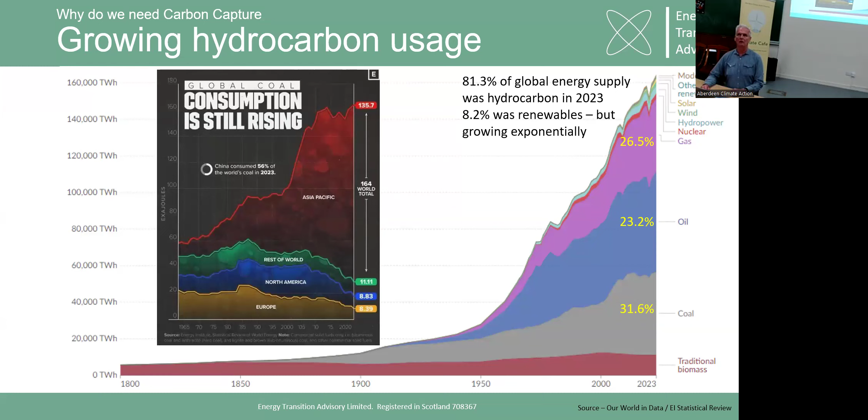And probably even more depressing, the consumption of coal has risen very sharply, notably in Asia Pacific, which translates to China. And when you build a coal-fired power station, you're generally building something that's good for another 25, 30, maybe 40 years. So we've baked in an awful lot of carbon emissions. So the thing we're considering doing about it is carbon capture.

And if you'll forgive me a little indulgence here, I'm going to use an analogy a couple of times tonight, an analogy with coffee. Coffee by itself is nice, tasty, but for some of us, caffeine's the problem. So we deal with the caffeine rather than getting rid of the coffee. And by a crude analogy, hydrocarbons work well for most people, but CO2 is a byproduct, which is clearly causing a problem, and we seek to deal with that.

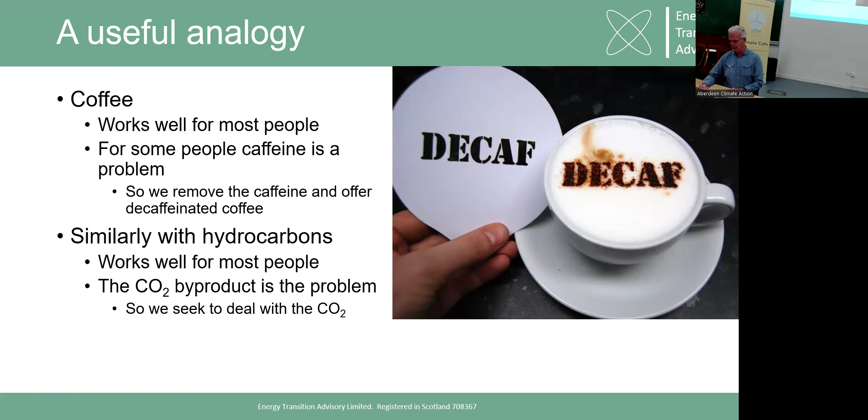So the carbon capture process, I'm going to build this slide up, starts with wherever we consume oil, gas, or coal. So this might be in refineries, chemical plants, fertilizer works, cement works, and so on. And at present, we dump all that CO2 to the atmosphere, sometimes for free, sometimes there's a carbon tax, sometimes there's an emissions trading scheme price.

And a couple of things to be aware of. The flue gas, that exhaust gas, is, depending on the nature of the process, between 3 and 15% CO2. So that means the other 97 down to 85% is not CO2. And the temperature is hot. It's come off a combustion process. So off the back end of a gas turbine, it might be 550 degrees C. Maybe at the top of a chimney, it might be as low as 150 degrees C.

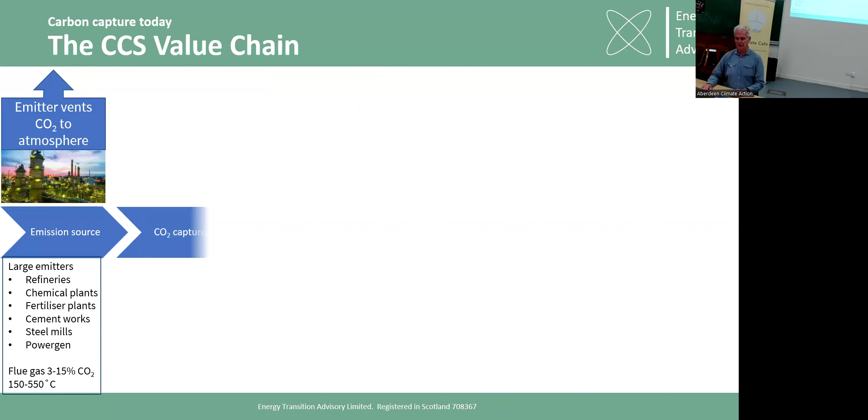So what we do at present is capture that carbon using pretty much one technology, and that is a chemistry known as amine. Typically, we can get through a year maybe between 90 and 95% capture. If the system's working well, it's 99 point something percent capture, but these things trip, they have imperfections. And the volumes we're capturing are big, between 250,000 and maybe 10 million tons of CO2 per annum. So this is a massive challenge.

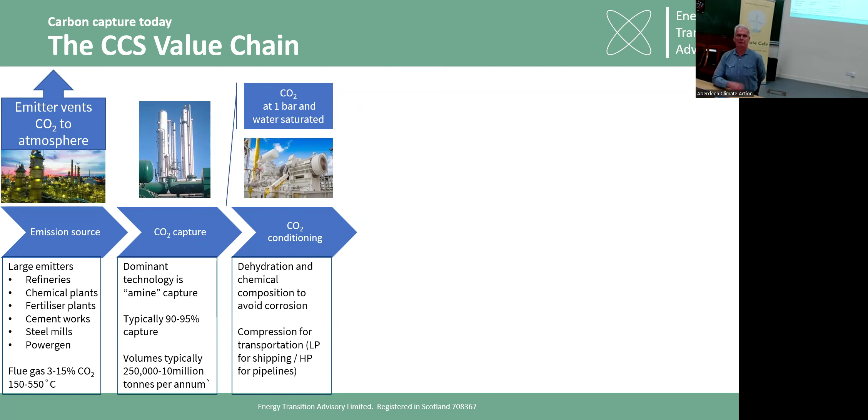Assuming the plant works, we end up with CO2 coming off the end, pretty pure, and water saturated, which is quite crucial. Water is a problem with CO2. CO2 by itself is not corrosive, but CO2 plus water makes carbonic acid, which rots steel very quickly. So we have to dehydrate it almost immediately, and we adjust any chemical composition depending on what was on the input side to clean it up.

We also compress the CO2 for transport, lower pressures for shipping, higher pressures for pipelines. Those pipelines, which are good for long distance transport of CO2, might be in the range of 80 to 120 bar, which is typical for oil and gas type pipelines. So we know we can build them. Density is about 1,200 kilograms per cubic meter.

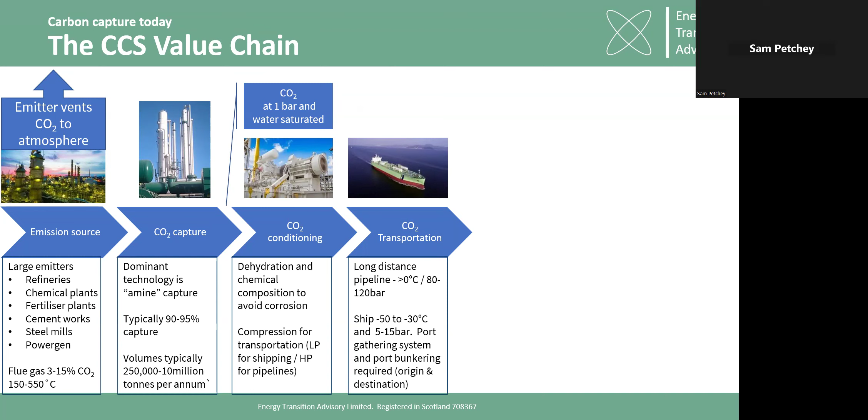If we ship the CO2, then we're between -30 and -50 degrees C, and much lower pressures because of the amount of steel required to contain the pressure within a ship. And of course, if you're shipping, you have to build a facility at the port of departure, another facility at the port of destination.

Assuming we've transported our CO2, it will generally go by pipeline to a store, so the same conditions in the pipeline. A typical storage well, we can inject in the order of 1 million to 1.5 million tons of CO2 each year, and we're injecting it deep underground into a storage reservoir. By deep, I mean 1 to 3 kilometers.

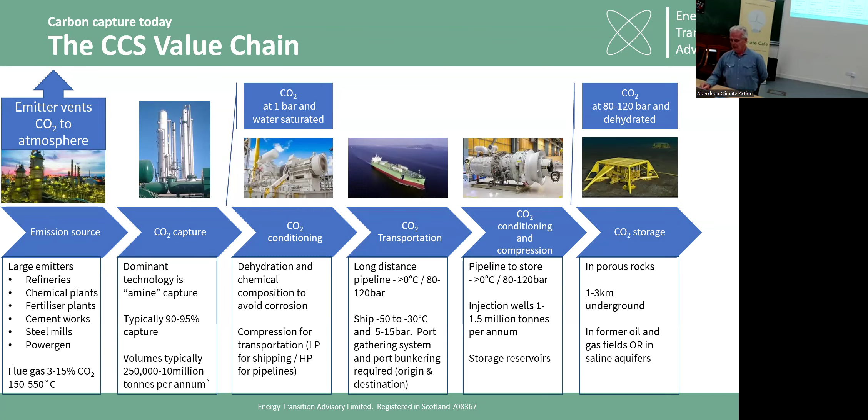Probably the neatest place, the most convenient, the best place we have most knowledge about is a depleted gas reservoir, where we've taken mass out, so injecting CO2 is relatively straightforward. You hear a lot about saline aquifers. There's much more storage, but they're full of water. So we need to, in many cases, remove water to inject CO2, or we need to find very, very big aquifers. So that's the basic process.

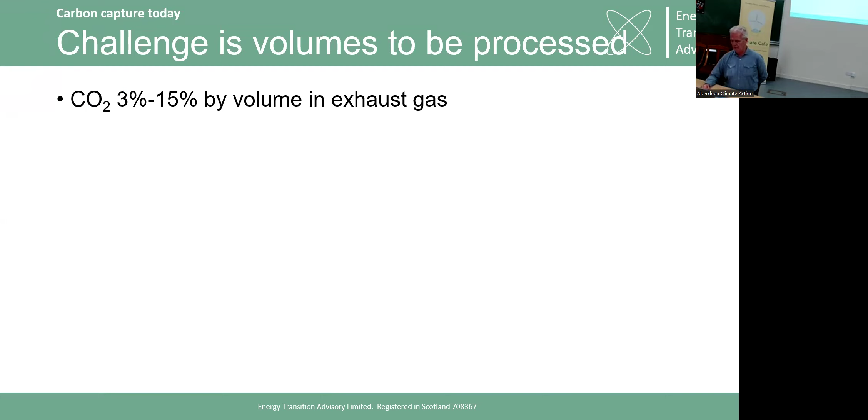The biggest challenge is this, the volume to be processed. As I mentioned, CO2 is typically 3 to 15% by volume in the exhaust gas. If I take a gas-fired power station, 3 million tons of CO2 means I've got to process 100 million tons of hot contaminated exhaust gas to extract the CO2. And to give you a sense of scale, I need to contact the CO2 in the exhaust gas with a liquid, a spray.

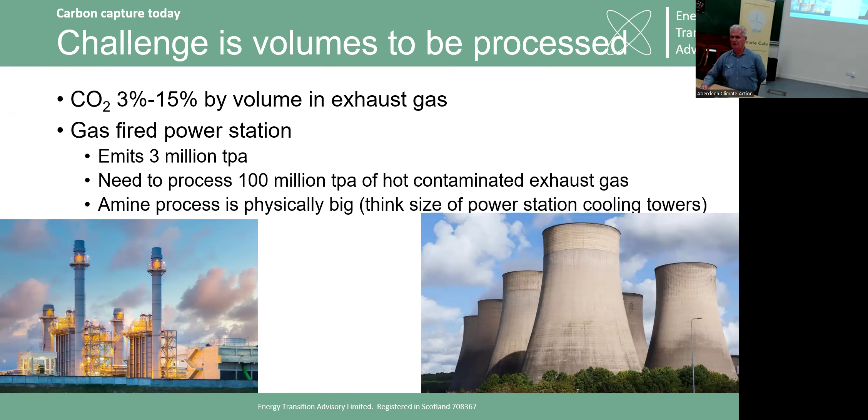And we need something of the order of magnitude the size of a big concrete cooling tower that we used to see at the old coal-fired power stations. Practically, we might end up with 4 or 6 or 10 smaller towers, but it's a huge undertaking to process this 100 million tons or so of fluid.

Now, the technology is actually pretty well established. Amine is a commodity chemical. It's out of patent. It's cheap. And it's very flexible. We have been using it for the last 50 to 70 years, extracting anything from 50% CO2 from a synthetic gas down to 0.5% CO2 from a natural gas. But at the scale we're talking about, as you'll see in a moment, it is both capital and operating cost intensive.

There are some newer amines which have been patented. Shell produced a thing they call Cansolv. Norwegian company Aker produced a new chemical, and a new start British company called Carbon Clean produced a new amine. These are, I would describe them as a bit better. They require a little bit less energy to release the CO2 from the amine, but they're still horribly expensive.

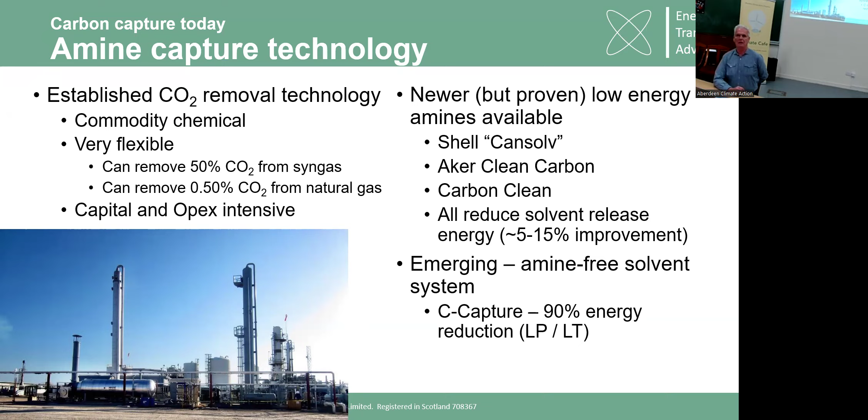There's an emerging liquid-based technology. A Leeds University spin-out has developed a liquid solvent which needs much less energy to release the CO2. So that's offering some potential, but it's still fairly early stage in its development.

Once you've captured it and compressed it, we need to transport it. As I said, pipelines are typically above 80 bar, density about 1,200 kilograms per cubic meter. We can ship at a variety of conditions. Low pressure and medium pressure are directly analogous to what we already do to transport liquefied petroleum gases around. So this is a modest amount of pressure, but very cold.

There's a new concept kicking around, which is to transport the CO2 in vertical bottles inside a ship, about a meter diameter, hemispherical ends, about 50 bar. And we could then inject that CO2 directly into a reservoir. So it offers the potential to reduce costs. But you'll see as we go down that list, the density goes down. So you need more ships to actually do the transporting compared to a pipeline.

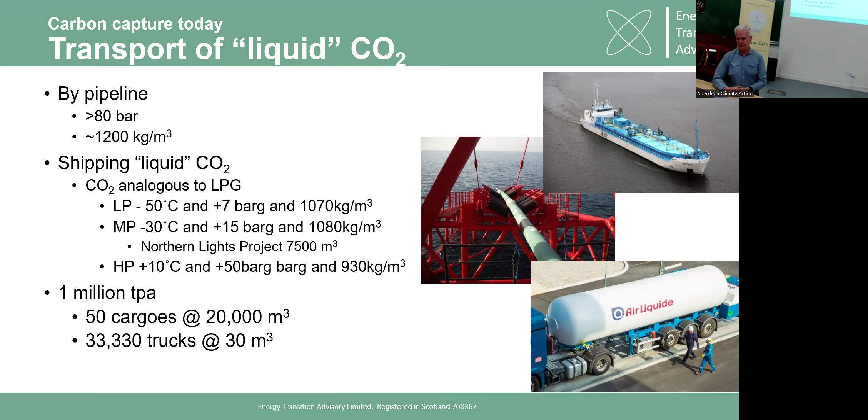And to put it into context, 1 million tons a year at some coastal emitter in Europe, shipping to somewhere in the North Sea, is probably about 50 cargoes on a decent sized ship, a ship by the way which doesn't exist at the moment, but it's potentially something doable, transporting by ship.

The CO2 process is very energy intensive. This is a phase diagram. You've got temperature across the bottom going from -80 up to +140, and you've got pressure in megapascals or bars on a logarithmic scale up the left-hand side. So at the amine plant, the CO2 comes off hot, but fairly low pressure.

In a pipeline, the CO2 needs to be liquefied in some way. So we're up either in a liquid state or a so-called supercritical state, which effectively is a liquid. So we're above that critical point. So we have to be both not too hot and quite high pressure. If we're shipping, we're down in this corner, much lower temperatures, but much lower pressures.

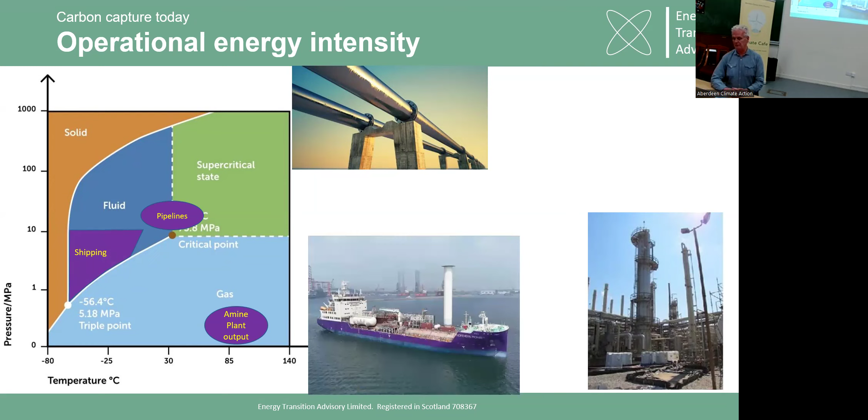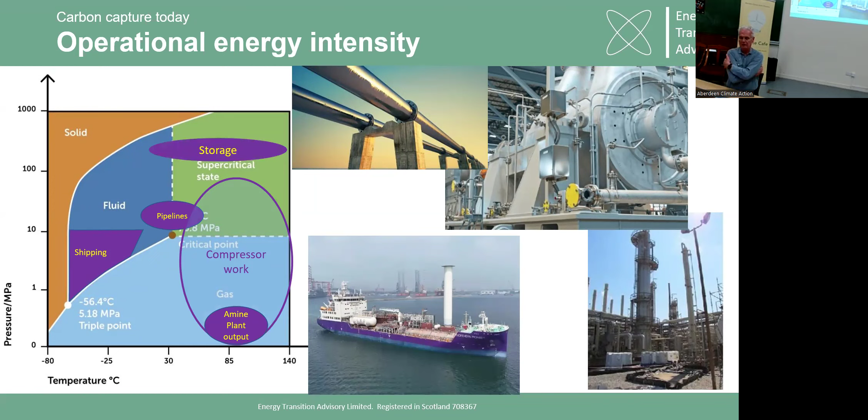And that particular ship is one of the two ships that's been built for one of the early North Sea CCS projects, the Northern Lights project in Norway. Oh yes, the compressor has to do a lot of work to move the pressure up, so a lot of energy is required to do that. And finally, we're going to be storing deep underground at quite high pressure, but quite high temperature.

So to summarize amine as a concept, it's technically well established. We can capture using amines, we can transport by ship or pipeline, we can inject underground. And right now, the Global CCS Institute counts 41 projects actually doing what I've just described. So capturing the CO2, compressing it, pumping it underground.

There's another 350 or so in development. I take that with a very big pinch of salt. There's an awful lot of projects that have been in development and then disappeared.

The crucial thing is that banks see this as proven technology. So if you're going to build one of these facilities, you're going to be spending hundreds of millions of pounds, and you're going to have to borrow money to do it. And banks take a very dim view of new technology. They don't like it because they see it as risky. So amine has one thing going in its favor, and that is that a bank will go for it.

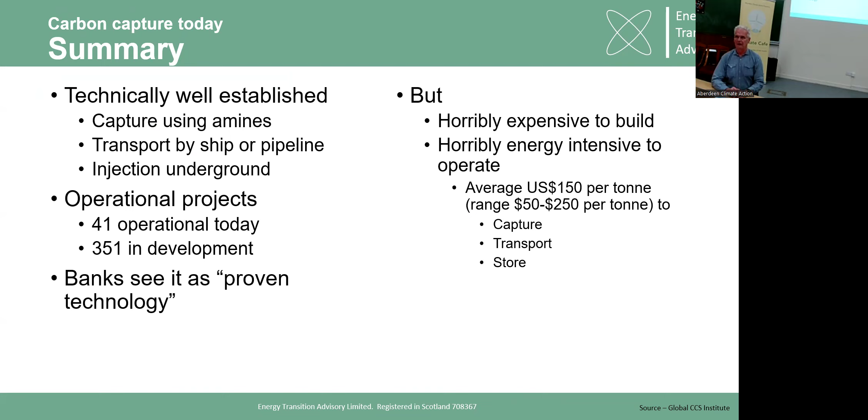But it is horribly expensive to build. It is horribly energy intensive to operate. And by that, I mean an average estimate about $150 per ton of CO2 captured around the world, and the range, sort of the easier things to do, maybe $50, and the harder ones to do, maybe $250 per ton. And remember, we emit 38 billion tons of CO2 each year at present.

It's also not very nice. It's caustic, toxic to humans, so we try not to release it into the atmosphere. And it introduced some exciting new hazards. So it's heavier than air, so if it leaks, it will displace the air, meaning it displaces the oxygen, so you die because you can't breathe.

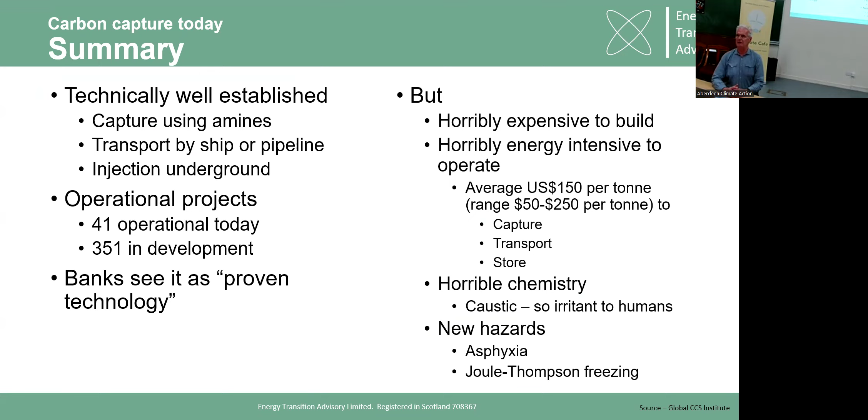And if you happen to be unfortunate enough to stand next to a pipeline that's at high pressure and it leaks, instead of getting what the oil industry worries about, a jet fire, you get a jet refrigeration. You get very, very cold, minus 70 or so degrees C. So literally you would freeze to death very rapidly. So it adds to the excitement.

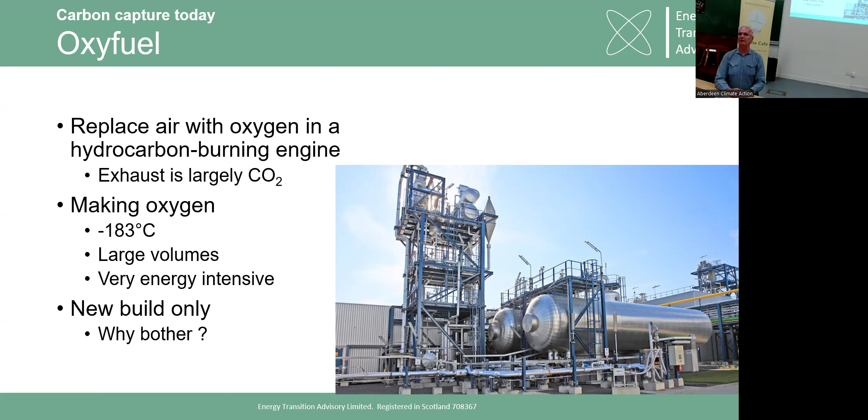Other ways in which we might capture that carbon dioxide is to do it differently. So there is a concept called oxyfuel, where you, instead of burning air with your hydrocarbon, you burn pure oxygen. As a result, you get pure CO2 as the exhaust, but the catch is you have to make a lot of oxygen, and that means freezing air down to minus 183 degrees C in very large quantities, very energy intensive. So I have to say I'm in the place of why would you bother? It's just as bad as doing conventional CCS.

Another approach is to do pre-combustion capture. So in this, you gasify, which means cook at about 1,000 degrees C, gas or coal or oil or lignite. This actually breaks the hydrocarbon molecules down. So you end up with a mixture of 50% hydrogen and 50% CO2. And you can then bizarrely use an amine plant to separate those two. The hydrogen goes off to a gas turbine to make electricity, and the carbon dioxide can be compressed and stored as before. But again, it's so expensive, why would you bother, if you can find an alternative.

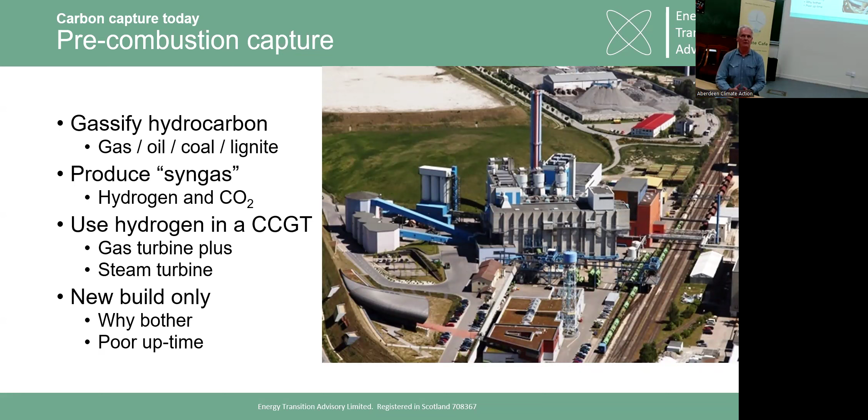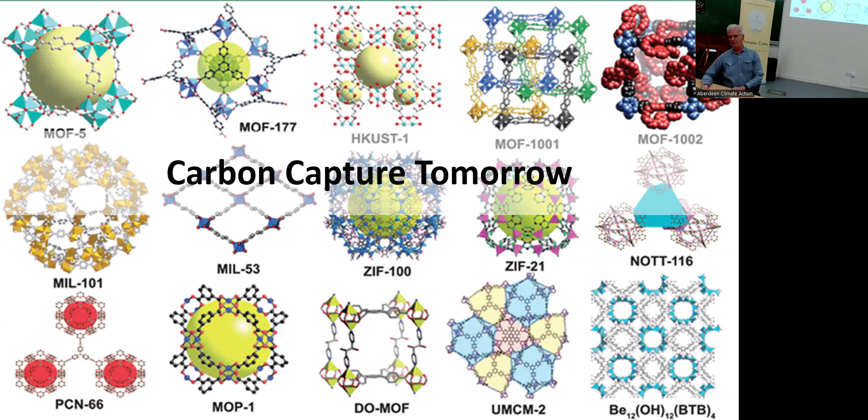And another particular issue with this approach is we've done it in a few places around the world where we've got lots of very low grade hydrocarbons, and they have very poor uptimes in the order of 60, 65%. So the technology not really working that well. So having told you we can do it, but it's not very pretty, there's a couple of alternative ways of capturing the carbon dioxide, which I'd just briefly like to review.

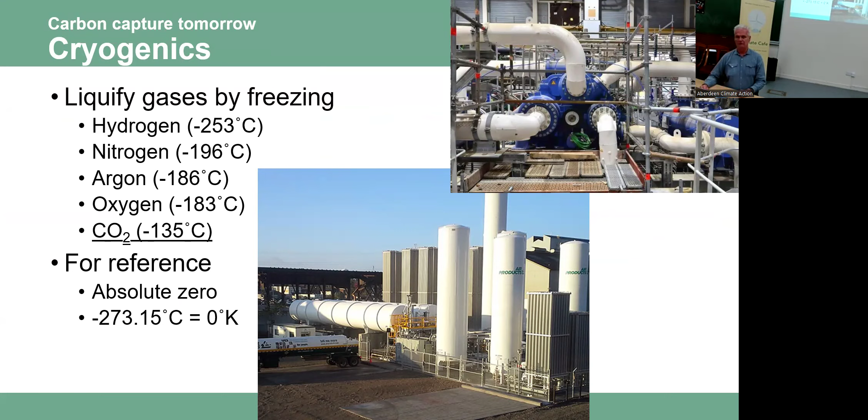Still in the why would you do it category is the idea of freezing the exhaust gas until CO2 drops out as a liquid, would happen at about minus 135 degrees C. It's a technique that we use when we're making all of those other chemicals above. We just literally freeze them out of the air. But we're talking about a lot of energy required to freeze these things, and just very, very expensive to do.

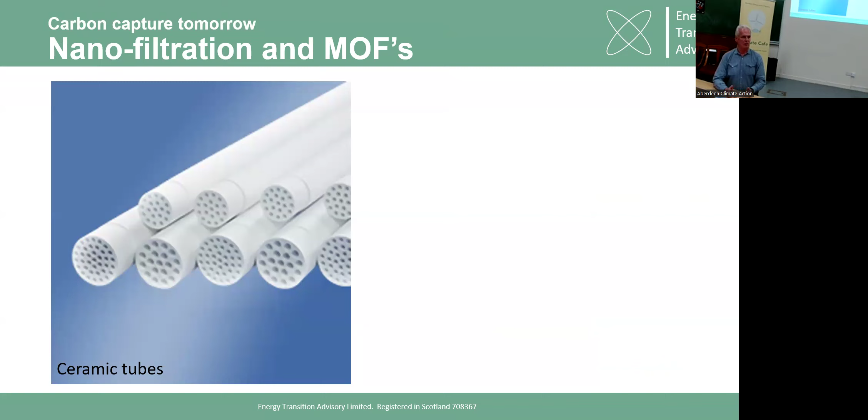Perhaps a little more likely, nanofiltration, so molecular scale sieves. These are ceramic tubes, a couple of meters long, about that diameter, and you can blow the exhaust gas up the middle, CO2 permeates out, so literally a sort of molecular scale sieve. The catch is that to capture CO2 from a big power station, you'll need a thing the size of an Amazon warehouse with literally millions of these tubes in. So a huge construction and huge maintenance challenge.

Probably greater potential is something called MOFs, or metal-organic frameworks. Effectively, if you think of these as a metal foam, the little gaps there are in the size of sort of a couple of angstroms, and what you get is a huge surface area. The CO2 adsorbs onto the surface, and you then heat the metal-organic framework up, and it releases CO2. Technically, we know it works, but nobody's done it at any sort of really large scale.

Oops, so maybe another possibility is to do carbon capture a bit later. And if you'll forgive me with the analogy, this is focus on capturing the carbon, but not worrying about when we capture it.

So what you have behind that banner across the top is, oh, can we get rid of that? That's good.

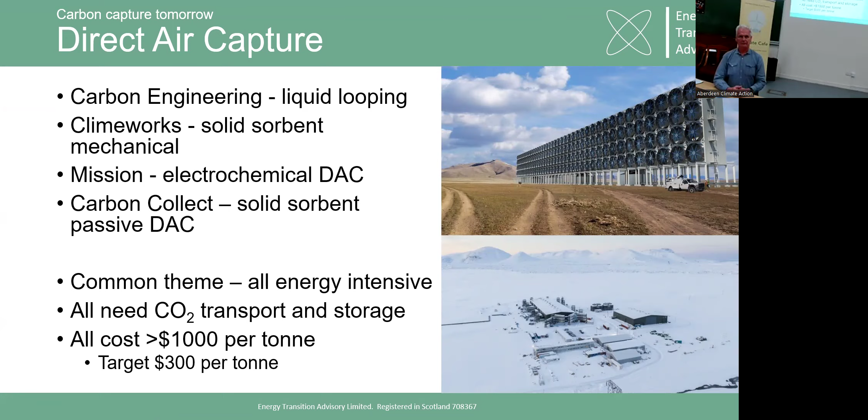Okay. Thank you. So the one concept we could use is direct air capture, where literally we're sucking CO2 out of the air. Now, if you remember, I said natural gas was 3% concentration. We're down at 400 parts per million in the air. So we've got a huge chunk of technology required to capture this. And it's frighteningly expensive. All of the technologies right now, over $1,000 a ton, with ambitions to get down to $300 a ton. So still not a very attractive thing to be doing.

Another solution might be to use the carbon dioxide, and there's a lot of people very excited about a variety of approaches: making chemicals, making synthetic fuels, using it to feed microalgae to make products. You can even, in a few places in the world, go and buy precast concrete products that are cured in CO2 tanks so that they are a little bit stronger, and they've actually absorbed some CO2. And perhaps slightly more controversially, you can stick it in the ground and get more oil out from an enhanced oil recovery project.

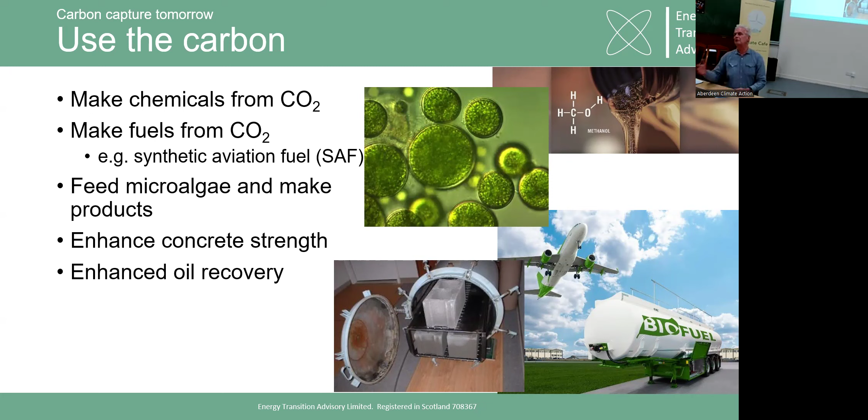The problem with all of these is twofold. One is that CO2 is a very stable molecule, so we need a lot of energy to make these products. And the other is that the quantity of any of these products that we need in the world, even the most prolific thing we need, concrete, is about 2 billion tons a year. And when we're emitting 38 billion, this will be a contribution rather than a solution to our problems.

Nature has rather helpfully been capturing carbon dioxide for many millennia, and there are a number of companies set up to do things like plant forests to absorb CO2, and to do things like wetland restoration, because wetlands and peat bogs absorb a lot of CO2. Commercially, they create credits, which they then sell to pay for doing this. And this nature-based approach actually has, I think, got some legs.

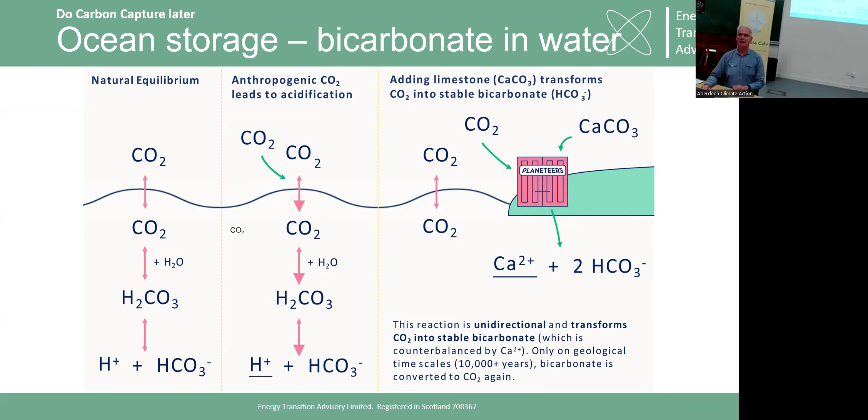Helpful? So there is a company in Germany that has patented a process to accelerate this and do this in a scale of days rather than waiting for thousands of years. And their product, which they then dump in the ocean, is essentially mineral water. It's water with bicarbonate already in it. The big attraction is that it's also slightly alkaline, so as well as storing a lot of carbon, it slightly counters the acidification of the ocean, which has been going on. So these guys have patented the idea. They're a small startup, but to my mind, have got a huge potential.

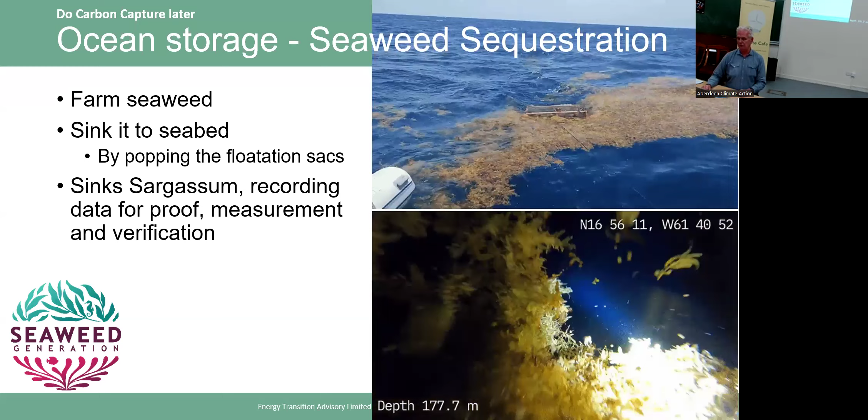Another approach is to farm seaweed to capture carbon dioxide. And most seaweed floats, it's got little air sacs. So this company has a little robot that squishes it all, pops all the air bubbles, and it sinks. So you have stored the CO2 in the plant life at the bottom of the ocean. I'm not sure what the longevity of that is, and I think that's one of the challenges with this particular approach.

And we have a concept called enhanced rock weathering, where, similar to the process in the ocean, we accelerate the natural process. Rain falls through the atmosphere, absorbs CO2, lands on the land, mixes with calcium carbonate, produces carbonic acid, and it decays to bicarbonate, which is then just deposited in the water under the ground.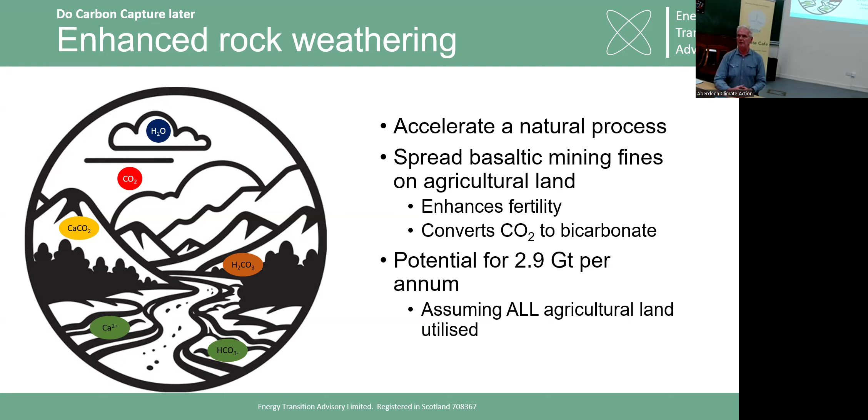The catch, again, is a thing of scale. Somebody did a paper, which I'm not sure how much credence one would give it, but apparently if you took all of the agricultural land in the world and did this, we might be able to capture about 2.9 gigatons of CO2 per annum. So again, a contribution, but not necessarily a solution. And if you'll forgive me laboring this analogy, you could just decide to do something else completely.

And my last couple of slides: if we just don't produce the carbon, the obvious thing is renewables. We know how that works. The price has come down spectacularly over the last few years to the point where solar is now the cheapest way to make electricity. And we have the potential to turn that electricity into hydrogen, of which there is quite a spectrum. The horrible stuff that we do today is either black or grey, where we're gasifying an existing hydrocarbon to make our hydrogen. Blue is what a lot of the oil industry hopes will happen, where you gasify the natural gas, but you then capture the carbon and bury it under CCS.

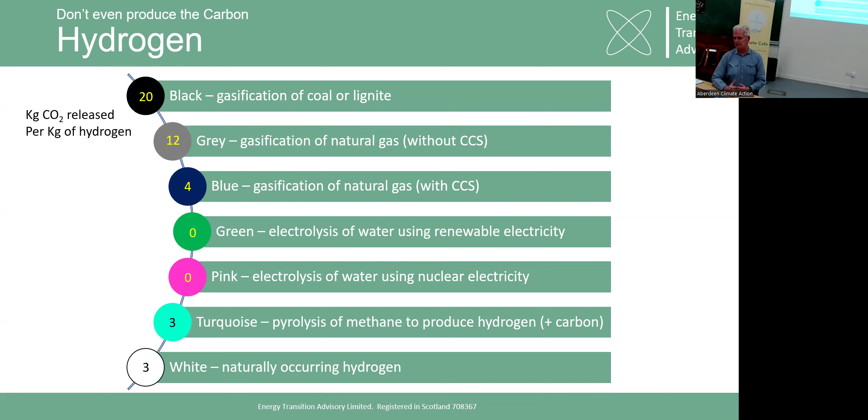But the holy grail is green, where you've got no emissions associated with it at all. Right now, it's economically more sensible to use your renewable electricity in the grid, which is what we do. But in the not too distant future, it would probably make sense to make hydrogen that way. Pink and turquoise, I won't bother with. White is an interesting one. That's the color attributed to naturally occurring hydrogen. And right now there are some people drilling for that in the hope that they might find it and use oil and gas technology to produce hydrogen in large quantities. I don't know.

So, ladies and gentlemen, that's my whistle-stop tour of carbon capture technologies. Sorry it took a minute or two longer, but hopefully you found that interesting.